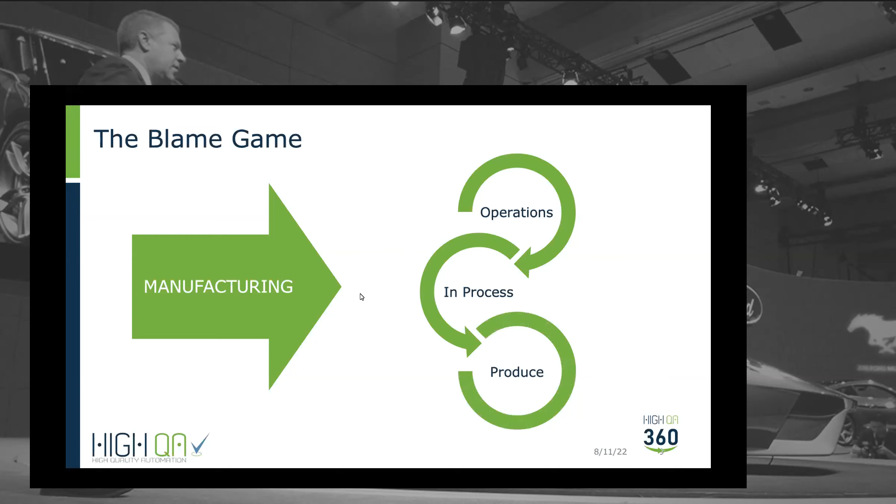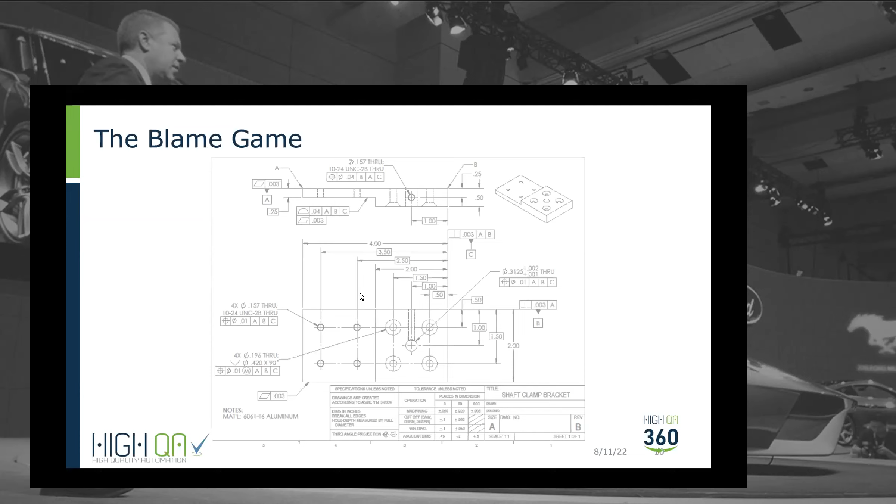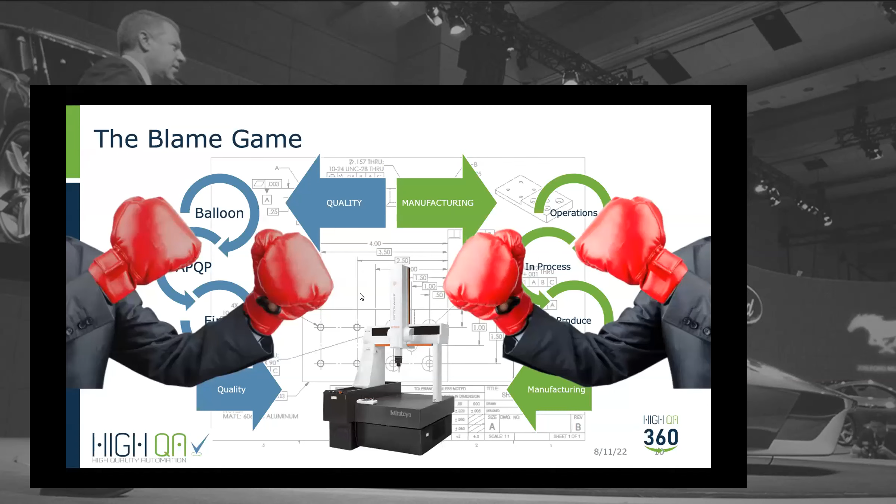Now, that process is outlined, set up, parts are produced and measured during the process. But then what happens? Well, in our not so made up scenario, the first time quality and manufacturing actually come together isn't until the part has already been measured on the CMM, long after the parts are made and measured in process. This sometimes produces the heated moment, right? Let's hope it's not fisticuffs. But that's when the blame game comes into play. We find the biggest issue our customers have is really collaboration between the two departments, or the lack thereof.

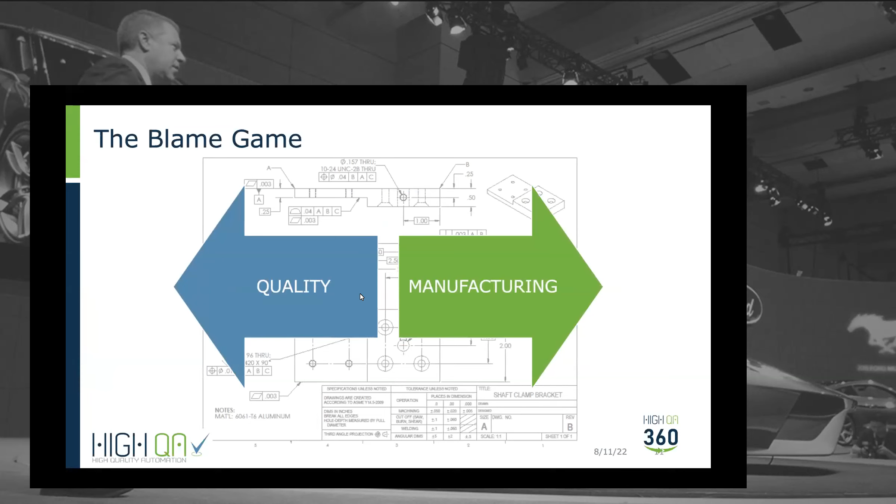What if we could take this scenario and maybe rewrite the process? Let's start with that very same print. Same process needs to be done, right? Only now, as it works its way through the company, the digital thread stays intact because everyone from manufacturing and quality are working on the same exact information.

The ballooning identifies all the engineering characteristics. Manufacturing identifies all the operations and in-process checks. Data is acquired both from the shop floor and the quality lab. All the inspection results are compiled into a final inspection report, and a complete submission package is created. This translates to increased transparency and drastically improved lead times.

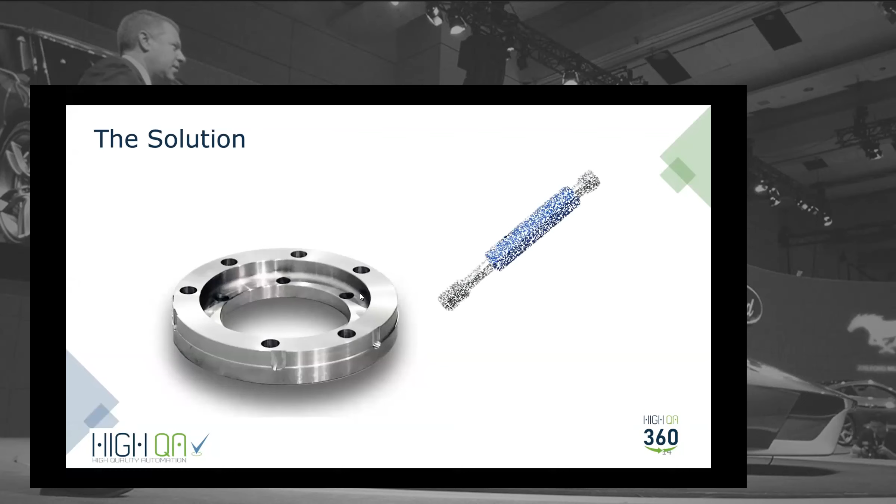Here's another quick scenario. Let's say we make this part, and these 3 holes are threaded and finished at op 30. The machinist is going to use a calibrated thread gauge to check the holes after they're finished in op 30, right? Most companies will recheck the thread at final inspection. Why? Why not use the data from the machinist on the shop floor who inspected it the first time?

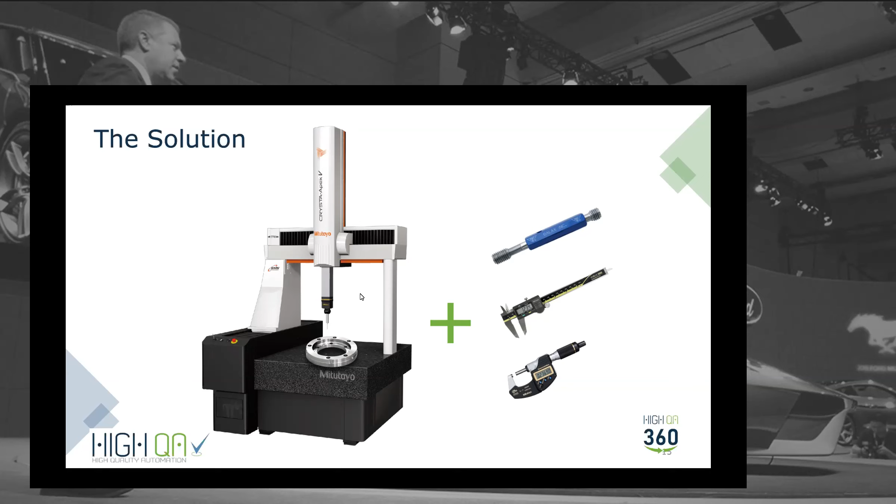Now, some companies decide to treat the final inspection as a double check and make sure the thread is good. That's fine, no problem there. But for other companies, measuring something in final inspection that's already been measured on the shop floor is time wasted and increases the time the part is in final inspection. How do we break the bottleneck to get the parts out the door faster without compromising quality? The answer is simple, yet commonly overlooked. The process needs to be automated.

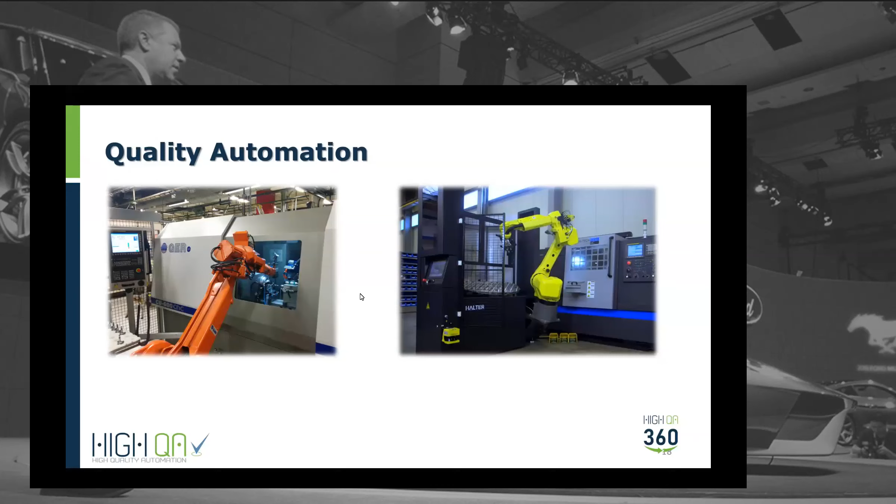When people think about automating a process, visions of robots and auto-load CNCs are usually high on the list. And why shouldn't they be? By some estimations, it increases throughput by 4 times. But why has so much automation gone into manufacturing without addressing the true bottleneck, the quality documentation process?

At High QA, we help streamline and automate your quality process. This is usually done in 3 phases: the planning phase, production phase, and the reporting and submission phase. For the rest of this webinar, we are going to primarily focus on the production phase. As a side note, when we get into the software in just a minute, we will be gathering a lot of data and then compiling it into a first article report.

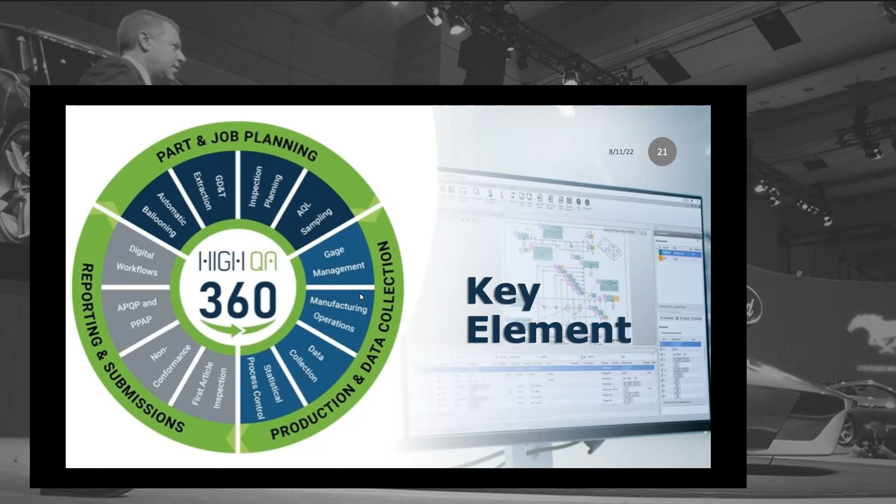But we can never get very far in our presentation without talking about one of our key advantages: the database. All the information you are about to see is securely stored in a database on your server, on your network, and it's available real time across departments. This is not a cloud-based solution, so you won't have to worry about data security. So let's jump into the software and have Jerrod show you how easy shop floor data collection can be.

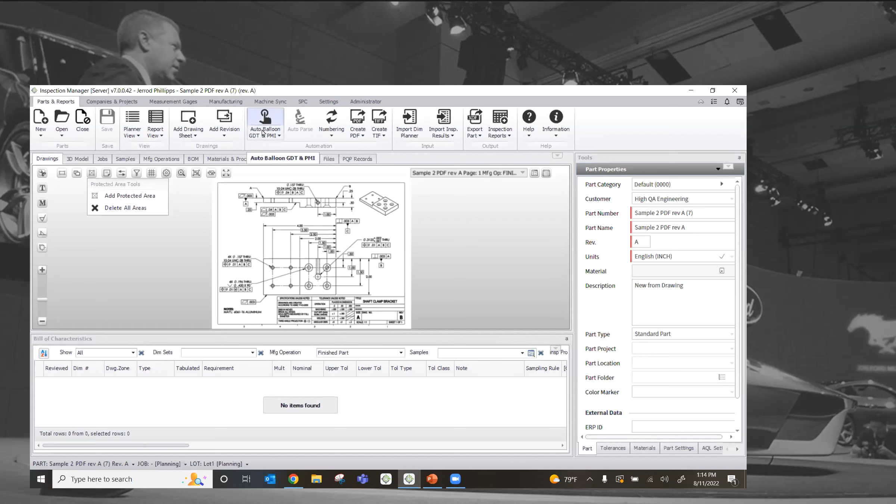All right, so let's get right to the good stuff, and that's right up here. You'll see this auto balloon button, one-click auto ballooning here, guys. So we're going to go ahead and do the current page. This happens to be just a one-page print, but you notice we handle multiple pages. You could be very, very selective. You just want to cherry pick which pages you'd like to balloon. And you have some other options here as well, if you want to do basic reference dimensions, so on and so forth. But let's get to the point here.

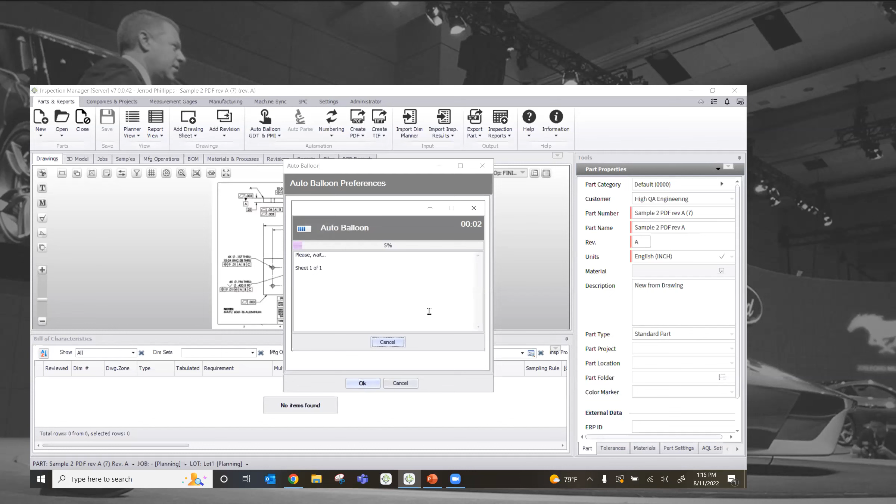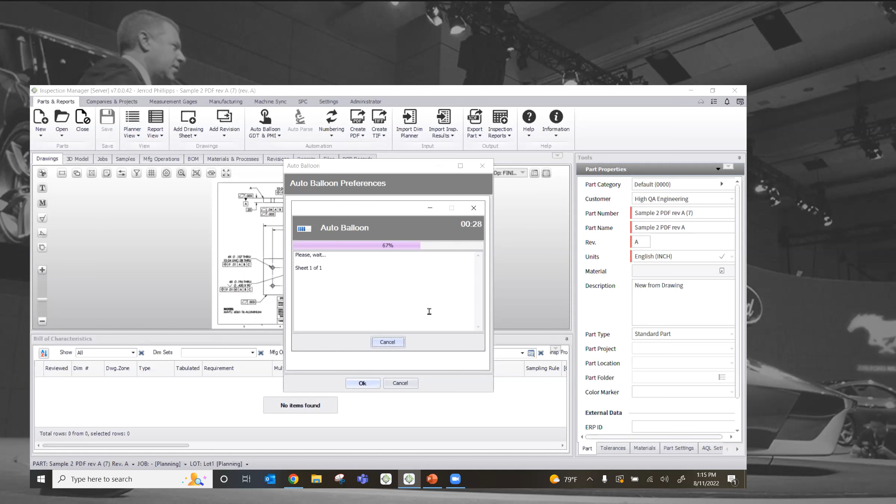Let's go ahead and hit the OK button and have our proprietary OCR, optical character recognition scanner, true AI capability here, guys. We are taking everything, all the GD&T, everything off of this print, all the dimensions, and we're going to digitize it. I mean, yes, we're going to auto balloon it. That's going to be very clear. But even more so, we're going to put this in a usable database format. Just as Rob said, that is a key component to our company, to our product, and what we have to offer to you is a database-driven system.

Okay, so let's take a look here at what we have. So as you can see, all the dimensions have been very clearly ballooned like so. But I'd like to direct your attention down here below, and let's go ahead and maximize this here for you guys so you don't have to pull out your readers like me. Let's go ahead and bring up the bill of characteristics. This is what we're referring to. Everything has been digitized into this nice table. It looks kind of like Excel. It's not. It's actually a table database. We're using Microsoft SQL, by the way.

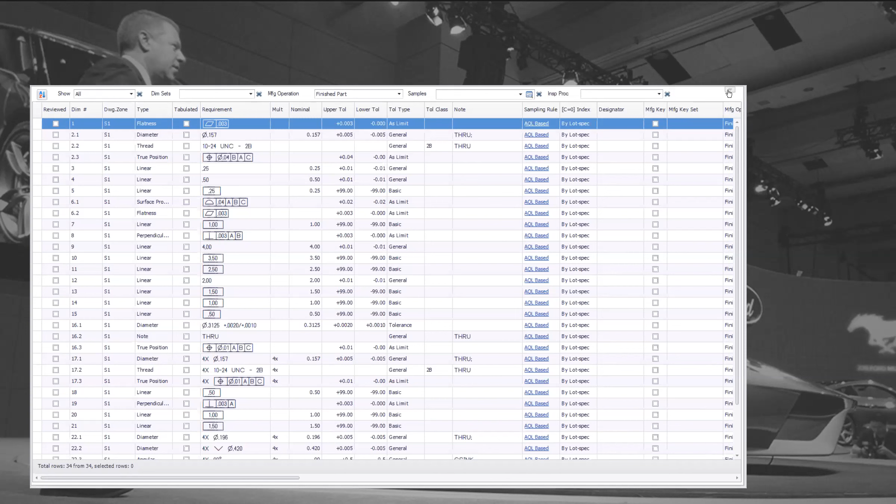So you can see every dimension, where those dimensions happen to be as far as the drawing zone, what type, the GD&T, your nominals, your tolerances, straight across the board. Everything usable from a data standpoint on that print is now here. We now have manufacturing and engineering starting with one version of the truth right here, guys. Okay, so let's go ahead and minimize and get back to our main screen here, and let's have a little bit of fun. Okay. So I want to direct your attention.

You'll see out here on your desktop all of these different little buttons up here, little widgets, little tool sets for you to be able to make your life that much easier. Creature comforts, you might want to call them. Well, one of those happens to be, let's go ahead and capture the material. Okay, so we'll go ahead and activate that. And watch what I'm doing here. I'm just going to box select.

And by the way, I'm not going to touch the keyboard at all here today. It's a beautiful thing. Keyboard equals possible accidental errors, fat fingering, so on and so forth. Again, if you're anything like me, you're missing keystrokes all the time. Well, with box selecting, we're making it very easy for input.

All right, so we've got our material captured right here, and you'll notice this little pencil. Okay, well, what's that all about? Let's go ahead and give that a click. And now if we want, we could fill this out even a little bit further. If we want to put in material codes, spec numbers, certification numbers, go right ahead. You can see right there, you can have a drop-down list of your suppliers. Very easy with the plus button to add a supplier to the drop-down list.

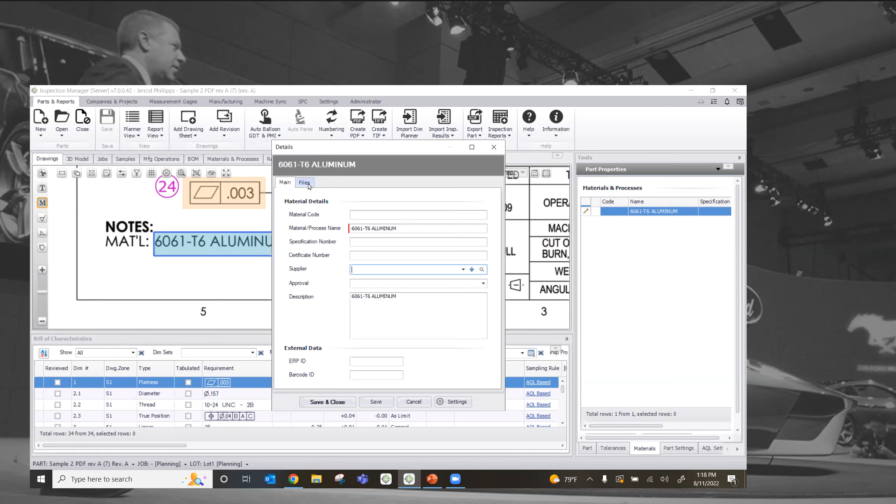You know what? Speaking of certifications, this is great. I want to make sure I don't miss this for you guys. Right up there, that tab, files. Let's go ahead and upload a material cert. Okay, I think I've got a good sample out here for you. Let's go ahead and grab this one and have it all cataloged right here.

So the reason I'm bringing this up, if you find yourself where you've got a tree directory out there on your network with balloon prints, with material specs, with this, with that, copies of everything, purchase orders from your outside vendors, all of that chaos goes away, because it's all captured right here. Again, one version of the truth. I really like to emphasize that.

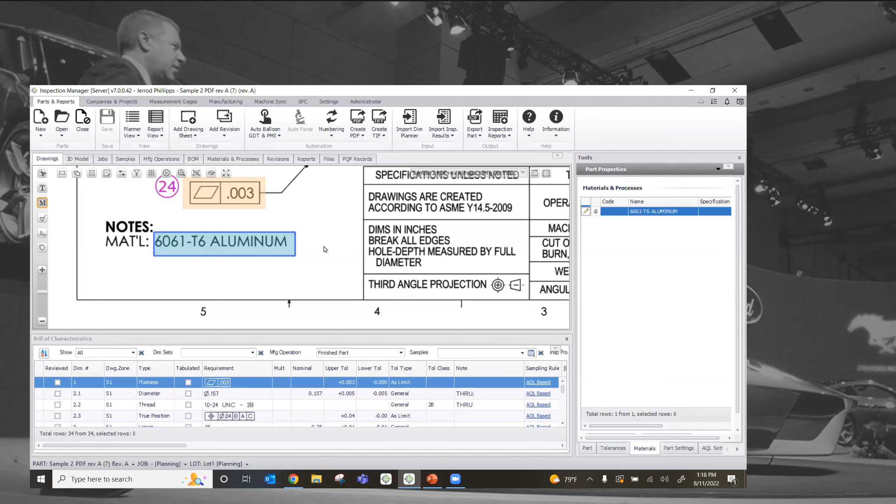Okay, now, we're not going to go through every one of these up at the top, but I do want to bring up one that's very, very popular with our customers, and let me explain why. A lot of people approach us and say, you know what, I've got a print that has hundreds of different dimensions that need to be measured. On this sample that I'm using, it's somewhere in the neighborhood of 25 or 30.

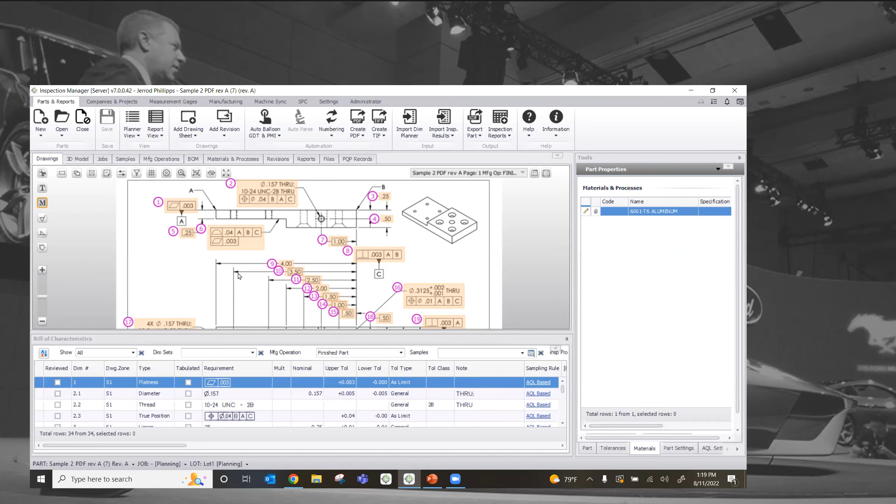And some people come to us and say, not only is it busy, with 100+ different dimensions, but it's not the best quality. Maybe it's a scan of a scan. You know the drill. Your customer sends something to you. It's got the coffee stains on it, it's got the machine oil on it, and it's just not the best quality. How do we manage that? Well, let's just do a quick little simulation here, shall we?

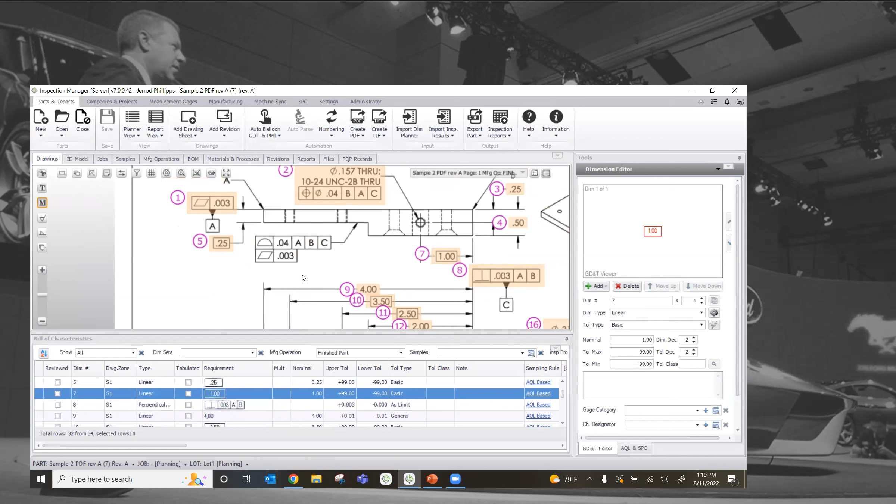I'm going to go ahead and do this. Let's focus on number 6 right here. I'm just going to right click and delete it. Let's say our OCR didn't pick it up. All right, it's not there. Well, watch this. Here's the popular feature that our customers absolutely love. Right over, let's see, right there, white out balloons. Watch this. Boom. That easy, guys.

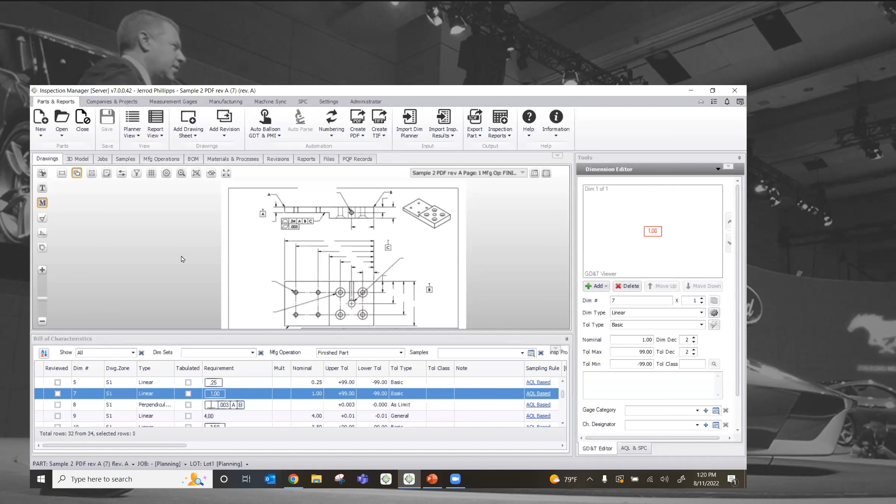One click. It took away, if you will, or hid everything that the OCR did catch. So what stands out like a sore thumb? Everything that it didn't. There's number 6 right there. And by the way, nothing went away. It's just hidden. I could just move your mouse very easily, and there's everything else. All right. So again, we have a poor quality print. It missed something. Now what?

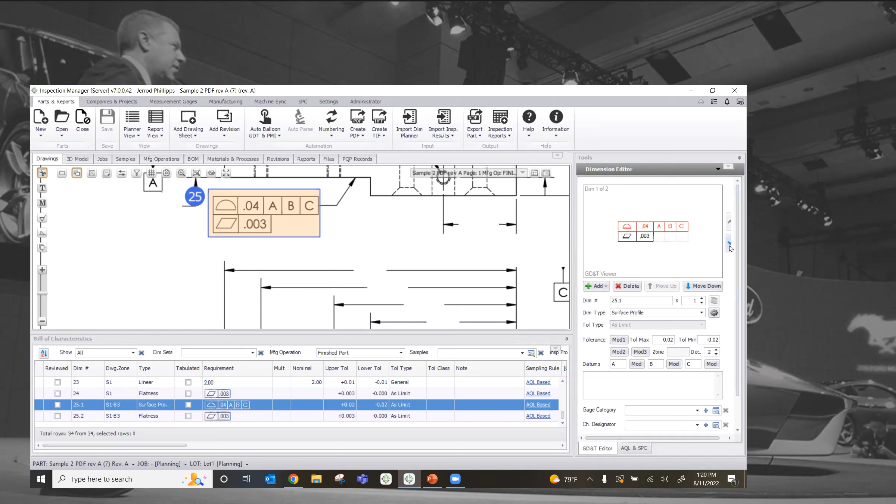Just simply go up there to your clipper tool and box select it, and watch that proprietary OCR engine go into effect. And there it is. So it captured that balloon again for me. And right there, you can see our surface profiles highlighted. And if I just carry it down, we can see the flatness as well. We're capturing all the GD&T for you guys.

All right, let's go ahead and undo that hide. And now we've got a situation here, don't we? Now, if it's an engineering change, maybe you do want to leave it as balloon number 25. For process purposes, that would be the way to go about it. But again, in our scenario, that wasn't the case.

It wasn't an engineering change. It was a case of the OCR didn't capture it. So what do you do? No problem. Don't fret. Just come right up here and auto renumber. It's back to 6. Life's good again. That easy. All right.

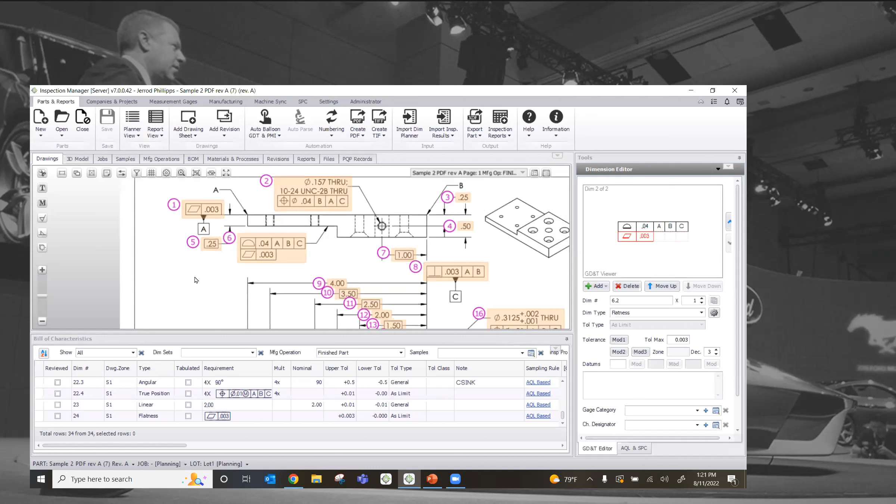Now, again, something that I think would be very important for our friends there in Canada, that is the focus of today's demonstration, is the conversion between English and metric, imperial and metric. Maybe you get the print in imperial and it needs to be converted for your shop floor in metric, or vice versa. What do you do? Well, I don't know how you do it right now. Maybe you pull out a calculator and again, open up all kinds of possibilities for non-intentional errors, but errors nonetheless. That goes away with High QA.

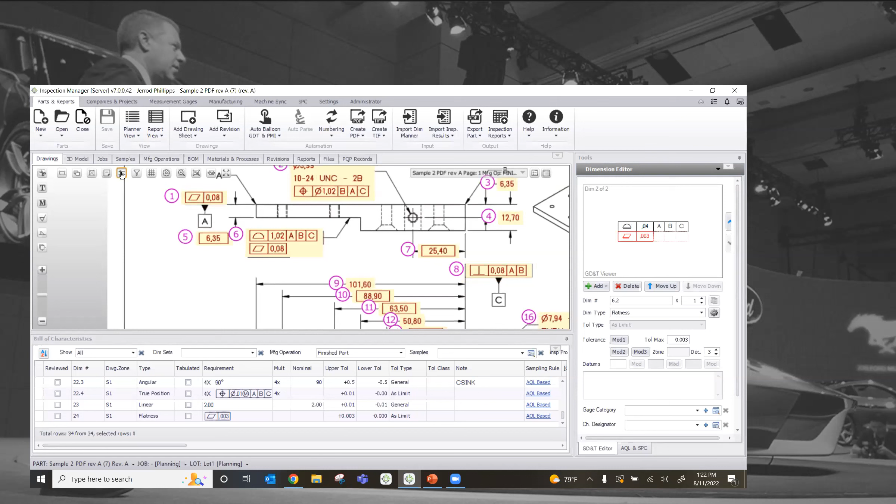Again, right here, one click, right on your toolbox. Alternate units, boom, there it is. There we are in metric. There we are in imperial. And when you first do the OCR scan, you can decide what you want your default to be. Perhaps for your shop, it's metric. Somebody else's perhaps imperial. It's your choice. Have it your way.

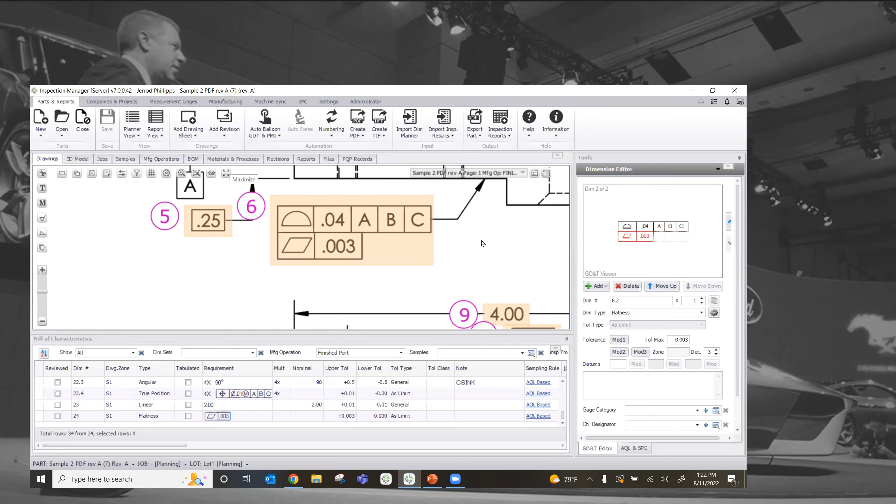Now let's do this too. Again, just want to show you some of these tools. We got a lot to cover for you guys in a short period of time, and probably a good time to mention that. If we don't cover something for you today, there's a very high ceiling to our software.

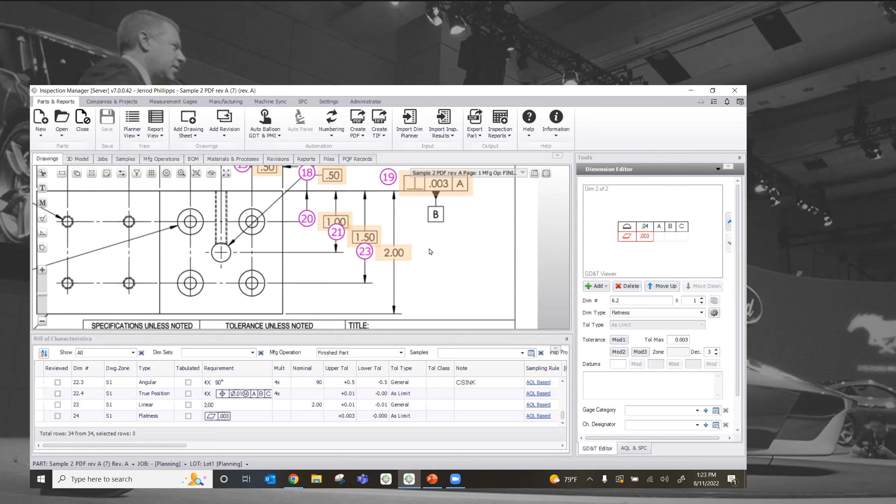All right. Well, let's do this here for you guys. Let's talk about tolerances. And I'm going to go ahead and focus on number 23 right here. So you'll notice that my nominals and my range is filled out automatically. Well, where did that come from? It came from the defaults that we can see right here.

But how smart is our OCR? Well, let's do this. Let's take a look at number 16 right here that has a plus plus. What about that? Well, right here, you'll notice that the plus plus overrode the default for all the other dimensions, all the other tolerances that are captured. But right here, that plus plus, we've got it captured right there.

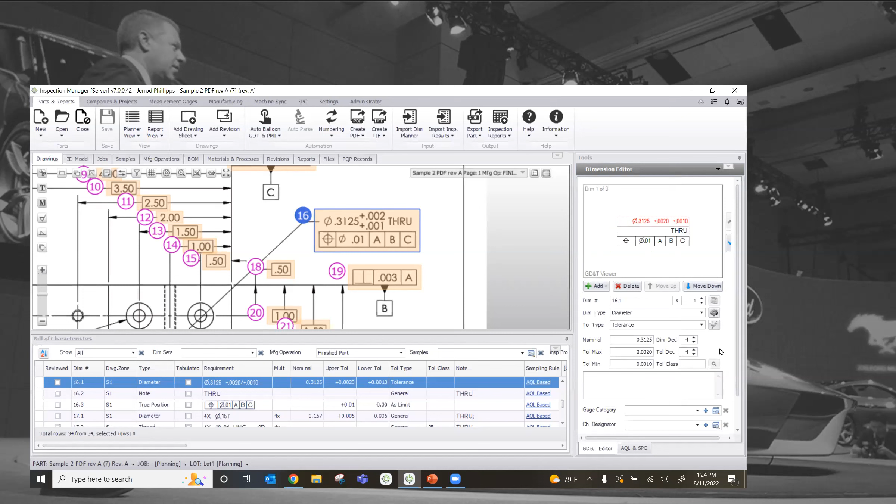Which, by the way, when you have a balloon highlighted right here, we'll highlight the row down in the bill of characteristics, and we provide you the dimension editor over on this side of the screen to be able to make any corrections, additions, anything that you would want. In fact, let's go ahead and do that. Let's go back to 23 here for you. And let's talk about gauge categories, and let's talk about designators.

All right. So let's do this. And keep in mind, we're in the planning stage here still. We're just doing the downstream preparation to minimize possible confusion or possible misinterpretation out on the floor, breaking the bottleneck. That's the theme here today, right? So let's do some of that prep work here at the very beginning. Let's be very specific. Again, for dimension number 23, you can see it right there.

We want to be very specific and tee it up for our guys on the floor to make sure you use this blade micrometer. That'll be a drop-down list of all of your gauge equipment. And again, very easy to use. I'm going to use blade micrometer, and even more so, I'm going to go ahead and maybe flag this dimension with a key characteristic designator.

Flight safety, critical safety, again, that list customized for your shop, whatever line of work, whatever your terminology happens to be, it'll be specific to you. I'm just going to choose key here, and we'll go ahead and save it. We'll save it right there.

And having done that, let's point out in the bill of characteristics, well, what happened here? Well, if I scroll on over, a couple of things happen. First off, I can see right there my designator, and based off of that designator, my sampling rules could have changed.

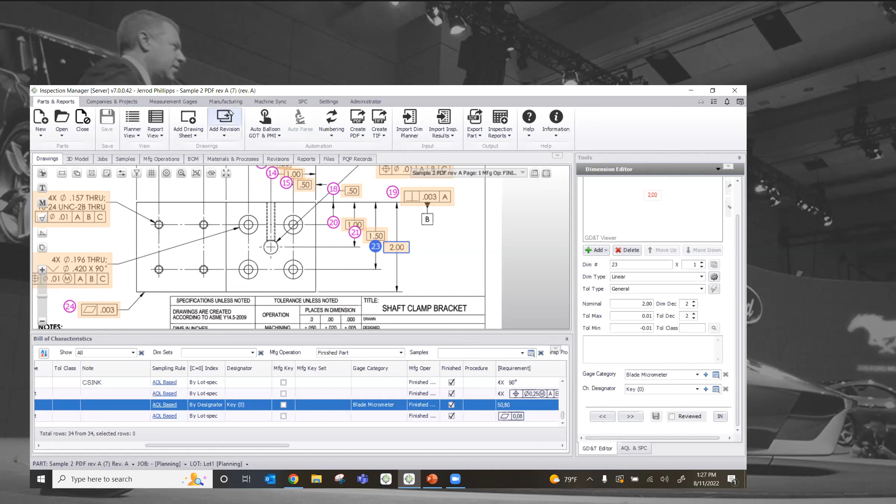But again, speaking of gauge management, boy, I want to make sure we go over this here for you guys. This is key. Right up here, we can manage your gauges for you right in our core system. By the way, what I'm showing you right here is not an add-on. This is right in our core functionality. So I'll tell you, there's a lot of great gauge management software out there, and I'm not here to downplay any of those. They all have their place in the world.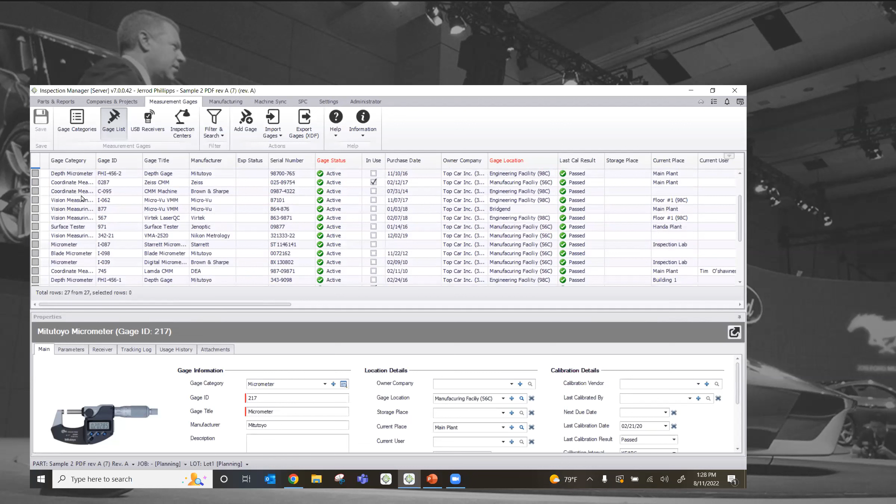But I would also share with you that it is very common for our customers to say, you know what, we moved forward with High QA, and not only did we pick up the ballooning and other tool sets, but we were able to eliminate 2 or 3 other software systems that we're currently using that just aren't talking to each other. Well, now, again, you're in one system, one database, everything coming together. So right here, you can see all your basic information for any of these particular tools. I'm going to go ahead and scroll on down here to one that I've got some pretty good data on right here. But a couple of things to note.

You can see the basic information, where the location happens to be, your calibration vendor, when it's last been calibrated. And by the way, you can set up notifications when it's time to calibrate. And, you know, even better, you can get out in front of that a little bit. You could go ahead and say, you know what, 45 days in advance of the expiration for calibration, let's go ahead and have an alert sent off. And that alert could be internal to you, could be out to your calibration vendor, could be both. Again, your call, all part of what we'll train you on.

All right. Now, how do you build this list? Well, if you already have that in a CSV file or in a system already, let's go ahead and import that in. Let's save you some time and effort to be able to load it in automatically for you, very easily mapped in from an Excel file. All right. Now, as I mentioned, a lot of great gauge software systems out there. Here's really where the secret sauce is. Here's where you would want to consider tracking your gauges in our system.

Right here, usage history. I'm going to get into data collection here, our shop floor interface, in just a few more minutes. But just know this, that when employees are using gauges on the floor doing their measurements, you have this. You have a full audit trail of usage history. So if your auditor says, all right, that thread plug gauge, show me every job, every part, every lot, down to the serial number. Everything that gauge has ever touched is right here. We'll show you the nominal. We'll show you the actual value that has been entered. And even more so, we're going to show you the name of the operator, date and time that put in that entry.

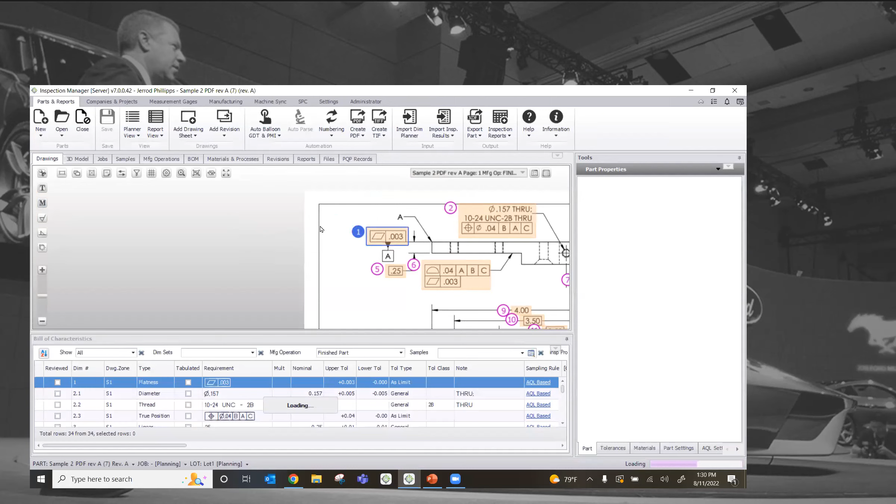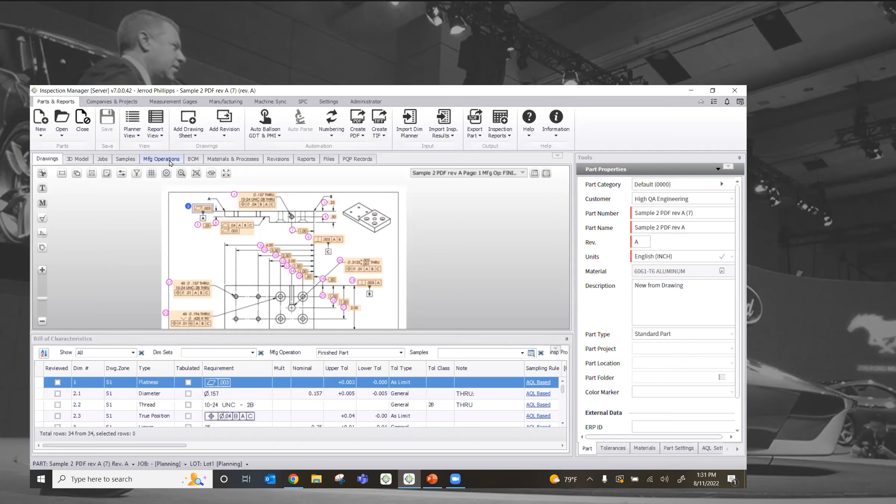So let's come back up here to parts and reports and get back into our drawing file. And we'll go ahead and center like so. And think of this again as the master part for everything about it, the jobs, the samples, and what I'm going to show you right here, manufacturing operations. But as you can see, there's even much more, and we're going to get into some of that as well. But again, we want to get manufacturing operations involved. So how are we going to do that?

Well, let's go ahead and start selecting some of these dimensions. I'll select this one. We'll select that one. I'm just holding the control button down and doing some manual selections right here. We're going to capture that and this right here and so forth. Whatever you want. We're going to capture all of those, and then right here, just hit add operations, and boom, those are all part of Op10 now. And you can see it's color coded.

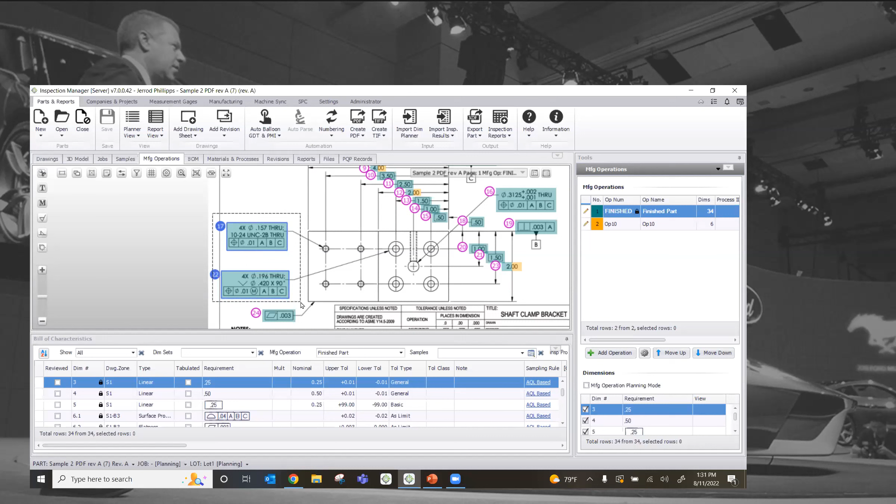Now I did that by holding the control button down. I guess I'm busted with touching the keyboard technically, but let's maybe box select these and not touch the keyboard and add an operation right there for Op20. Fair enough. So you could do it either way. But let's go into Op10 here for you guys. Go back to that pencil. Whenever you see the pencil, there's some extra meat that you can put on the bone right behind the scenes. So let's indeed do that.

And I do need to touch the keyboard here because I want to call this a roughing operation at Op10. And if I care to, I could be specific as to the work cell, the machine. I don't have to. You'll see some fields that are in black. That means they're optional fields. Put them in there if you want. Anything with that little red line, those are required fields. Can't get out of the window until you fill those in. No big deal. Choose your color. Make it very personalized, however you want.

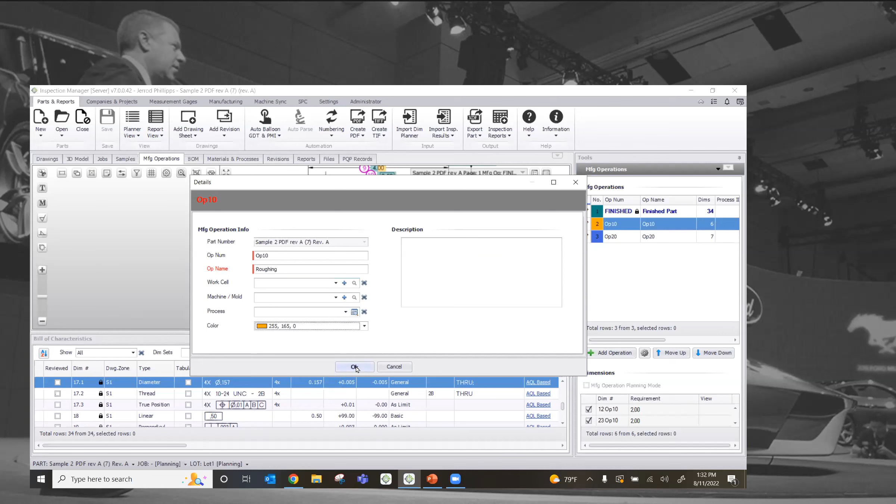So now that we've done that, let's get down here into our bill of characteristics, and you'll see right there manufacturing operations. Let's get out a finished part, and let's have this filtered just for those roughing operations. And look what you have here. You have a print specific for Op10. And the beauty of this is we didn't renumber the balloon numbers, the dimension numbers. They are still what they should be. So there's nice consistency between these balloons and the finished part.

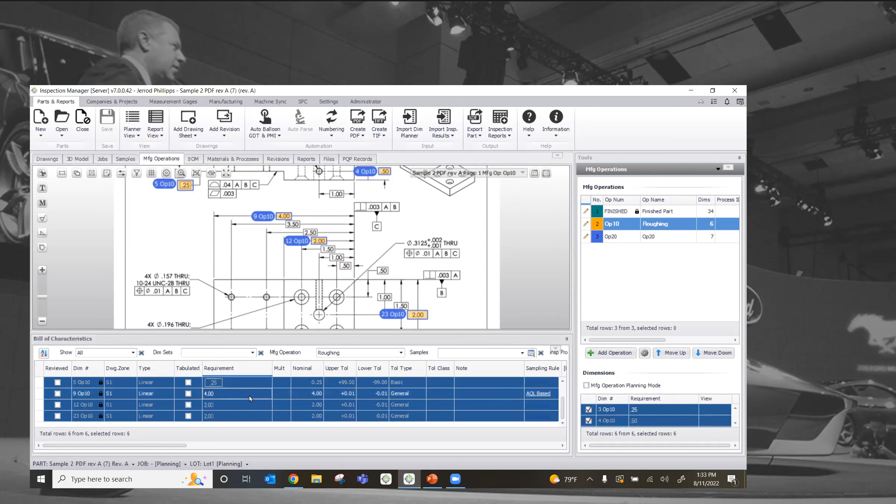Now let's go ahead and select all, just for these operations of roughing. We're going to do what we call a bulk update. It's a roughing step right here, right? So we're not going to machine to the finished dimension, of course. We need to leave some stock on there for finishing. So why don't we update the nominal value? And again, this is just for this roughing op. It's not for the whole thing.

So I'm going to say nominal value, and let's add 20 thou on there. What do you say? And I'm going to say add value, but you'll notice some choices there. Maybe you want to do it by a percentage, up or down. Your choice. But we're roughing, so we're going to add a little extra meat right there. If I want, gauge category, maybe we want to be specific and say use a blade micrometer.

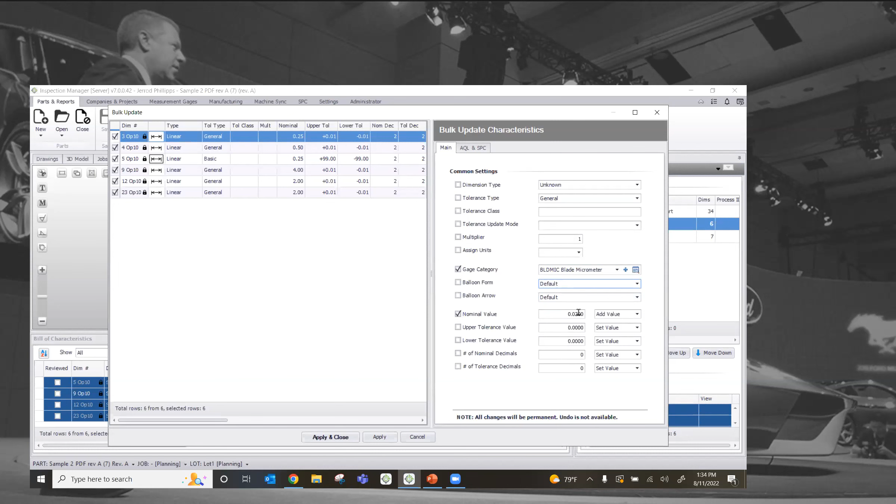When you are doing all of these measurements for roughing, let's go ahead and do that. And if you would want, you could get cute with it as well and change balloon arrow or balloon form, change it to triangle, hexagon, whatever it is that you want. But the real thing that I wanted to share with you here, guys, is if I go ahead and apply and close, you'll notice right there that we've got that 20 thou that's been tacked on to our nominal just for those roughing operation steps.

All right, so now that we've done this, let's go ahead and right up here to our reports, let's print out an inspection plan. And you can also print out the PDF right here of the current page just for the roughing operations. But let's go ahead and print out the inspection plan here for you guys.

And the system, High QA, we provide you with the report writer. You do not need us. We'll be happy to help you with it, but we provide you the tools to customize and change any of the documents, any of the forms that come out of the system. All right. So we're going to go ahead and print out this inspection plan just for our roughing op. And I think you're going to like what you see here. All righty. So here we go.

So just those steps. Again, you can see the 20 thou that's been tacked on to all of those. You can see that key characteristic designator that I tacked onto number 23, and the fact that we're using the blade micrometer across the board, with all of those.

We looking good? I'm hoping you guys are liking what you're seeing. I wish we were in person, because this is typically the time where we really get a lot of nodding heads.